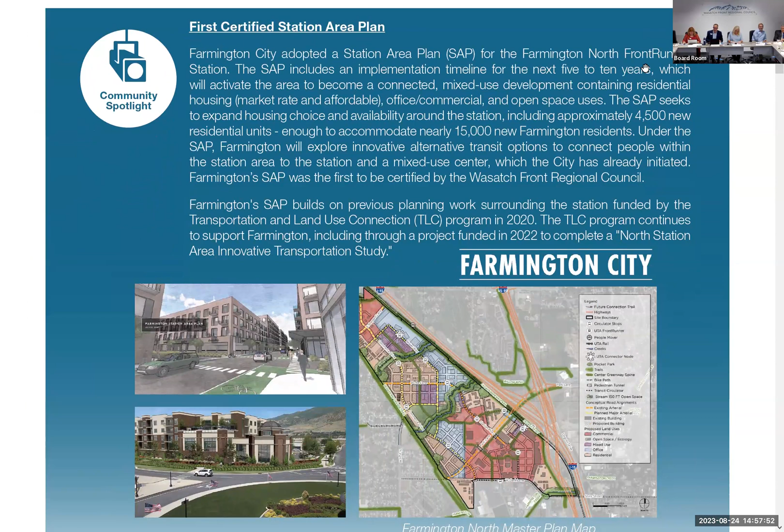And I just want to highlight a few of these efforts in your communities. The first station area plan that was certified, Farmington City. We were able to help Farmington with TLC funding to develop that station area plan around their FrontRunner station, housing, transportation, mixed use around their FrontRunner station.

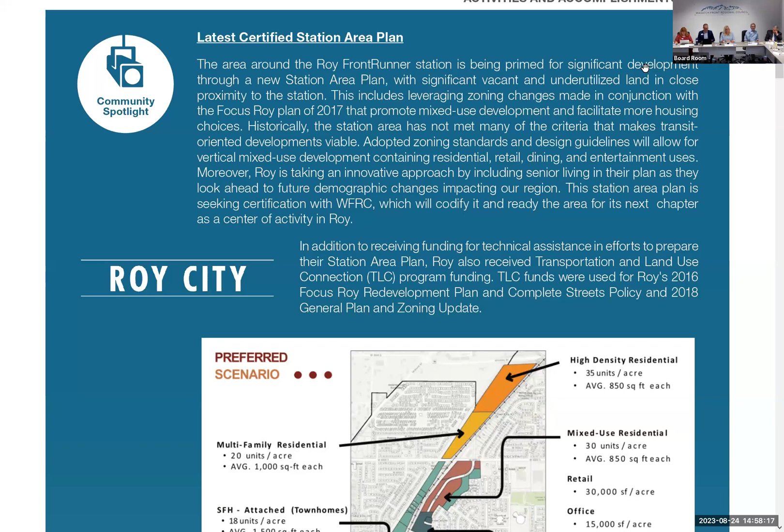Mayor Dandoy, we were able to support Roy City over the years, and we're going to be looking to certify. You'll have the opportunity to certify the Roy station area plan around their FrontRunner station. And we've been able to partner with Mayor Dandoy and the community to develop that station area plan in Roy.

Mayor Dahle, we've been able to help Holladay City, as you know, with multiple TLC awards for development in Holladay for their active transportation study, their Wasatch Boulevard master plan, working on their general plan update with multiple awards over the years. And Mayor Petro in Layton City, again, multiple awards in Layton City for 5 TLC projects over the years. Their effort Envision Layton, their town center master plan, developing their long-range economic development plan.

All of these, if you add them all up, we have been able to support 150 projects or efforts, planning efforts in communities around the region. And again, they are all designed to help your communities and help our region as a whole implement that Wasatch Choice Vision and ultimately promote great quality of life.

Now, it's not just about planning. We also provide really high quality data and tools and analysis, mapping work that we offer, forecasting and modeling. This is in the technical expertise space that we offer, and then analysis.

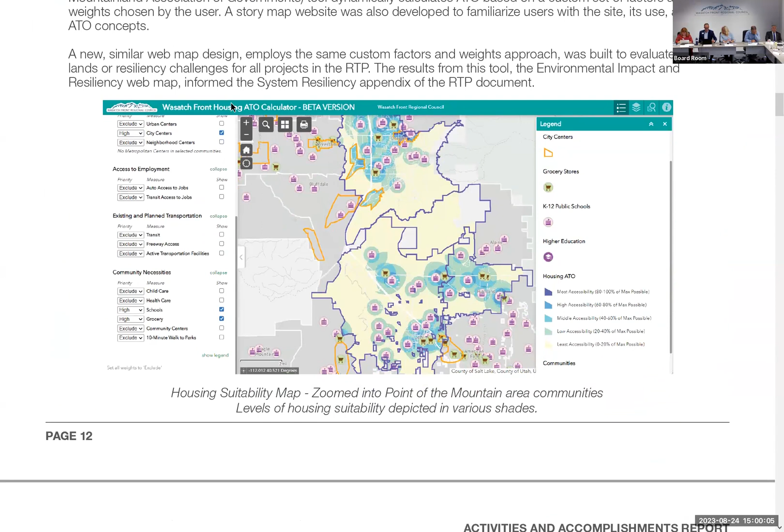Lots of more information in here. I'm sure all of you are going to read this full report word for word. You've probably all read it already. So I'm going to skip over some of the details here. Oh, thank you, Mayor. Of course you did. That's why you're the chair.

We also, of course, we've talked about the Wasatch Choice Vision. In transportation, there is a statewide Utah Unified Transportation Plan, and all the transportation agencies working together are putting this together, and it was on track to be completed in October and then shared with everybody looking ahead to October. So we're looking forward to that.

Okay, goal number 2 is to effectively administer ongoing plans and programs. This is our core transportation work, and at the heart of it is collaboration. We work with the cities and counties and so closely with UDOT and UTA, and I want to express appreciation, Carlos and everybody at the UDOT team and to the UTA trustees and all the staff. That partnership in transportation planning is so solid. It's the best that I'm aware of anywhere in the country. We should all be really proud of that.

And we know that this year in adopting the TIP, in adopting the regional transportation plan, there was significant public interest. You all remember this, of course. And I think that that is an indicator of the fact that these issues that we work on here together, they matter. They are important to the future of our region. I am proud to say that ultimately the regional transportation plan was adopted unanimously. And I hope that we handled and conducted our work in that process, demonstrating competence and integrity and ensuring that we followed a good process where people's voices were able to be heard. I think having that process and the dialogue and engagement leads to better plans and to better outcomes ultimately.

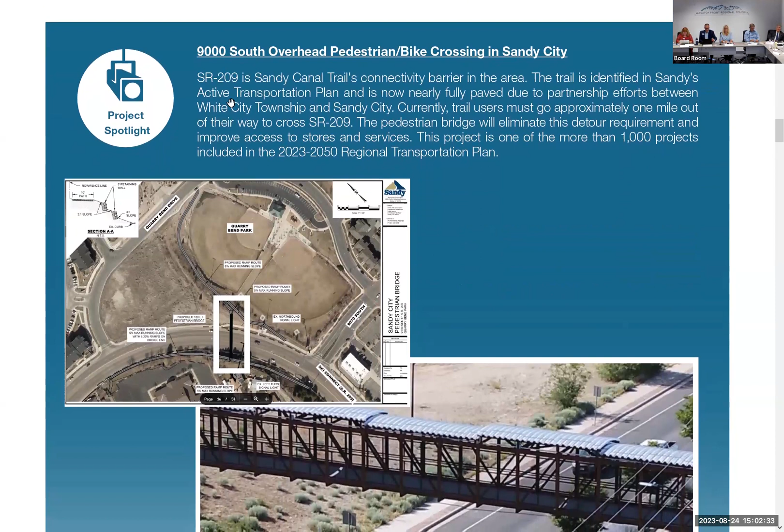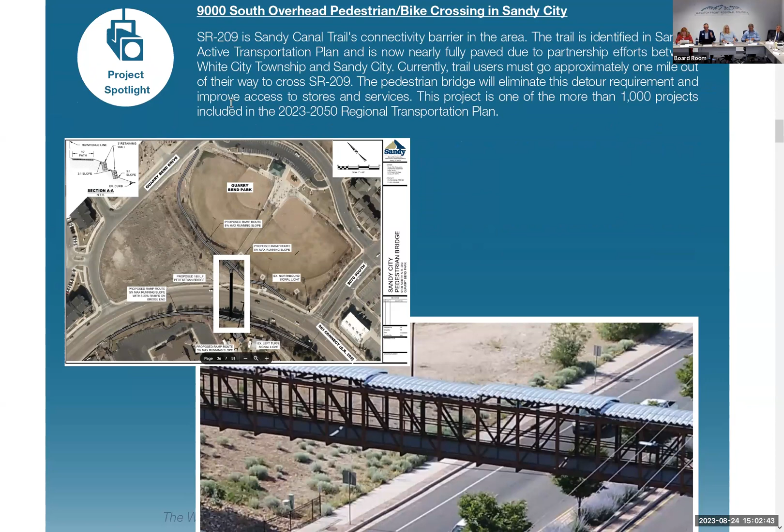Now, what are some of those projects? For example, in Sandy City, and I know Mayor Zoldan is online with us, the 9,000 South overhead pedestrian and bike crossing to give people better access by bike and by foot within key areas of Sandy City.

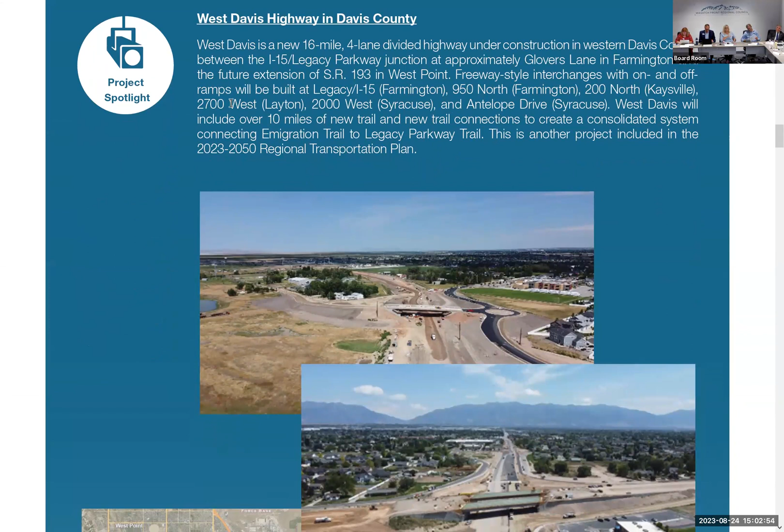Major roadway projects like the West Davis Highway, being constructed now in Western Davis County, emerge out of the planning process. Those are elements in the regional transportation plan, which covers the next 20 to 30 years.

The TIP, the Transportation Improvement Program, covers projects anticipated in the next 5 years. We'll get to action on the TIP later in the meeting. Part of what we do is provide funding directly to your communities.

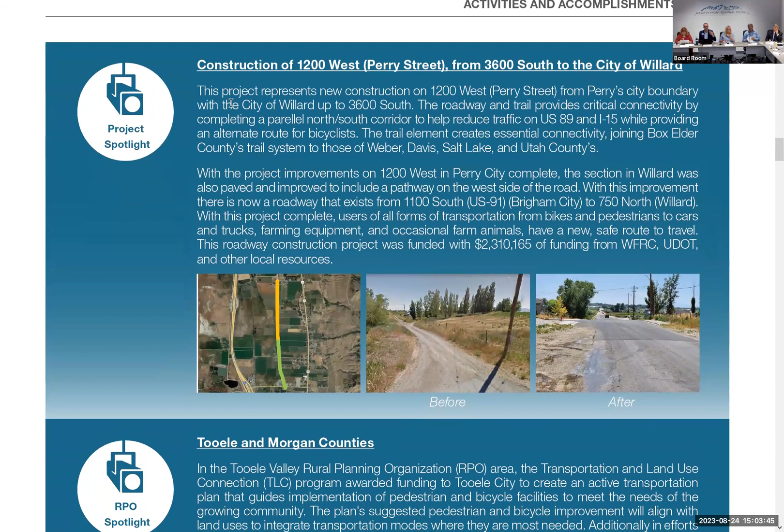In the last year, we funded 41 projects totaling $67 million, like expanding green bikes in Ogden City, Mayor Caldwell, and in Box Elder County, providing funding to construct 1200 West to connect the cities of Perry and Willard.

In Tooele and Morgan counties, planning works somewhat differently than on the Wasatch Front, Commissioner and Council Member. We support the rural planning organizations there and work with UDOT and UTA on transportation planning. In Tooele County, we funded an active transportation plan. In Morgan County, we provided funding for the Weber River floodplain mapping study, really important given all the rain we got this year. We're happy to help all our communities around the region.

Now I'll skip to goal number 3. We're talking about a lot of funding, right? How does this stuff get paid for? Where does the money come from?

Part of the work we do in goal number 3 is providing subject matter expertise to federal, state, and local officials and policymakers.

And I hope Representative Musselman says, yeah, you're providing good expertise at the state level. Thank you, hopefully. Yes, he nodded yes, terrific, okay.

At the federal level, we've worked to help make sure there's stable, predictable, ongoing funding for transportation. You all remember the relatively recent adoption of the Infrastructure Investment and Jobs Act.

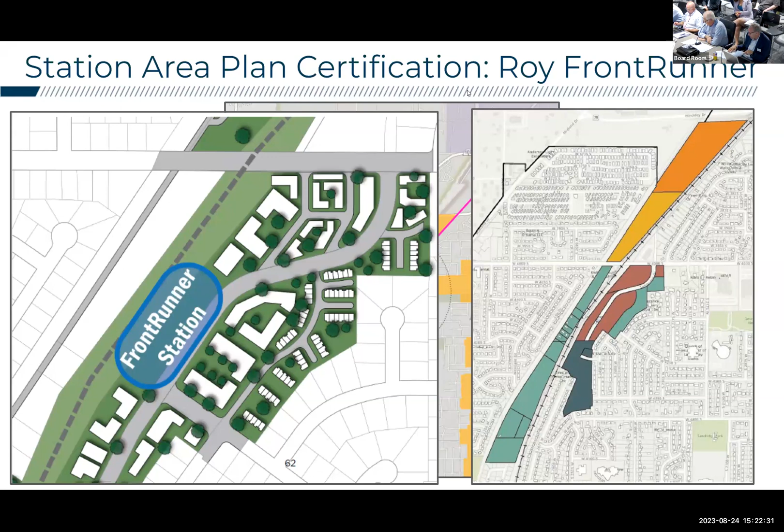I would make the motion to certify the Roy Area Station Plan as has been presented. And I will enthusiastically second.

Okay, I'm gonna have to choose then between Harvey and Shepherd. I don't want that on me. No, I know. Okay, we'll give the second to Commissioner Harvey then. Okay, thank you very much.

We have a motion and a second to certify the station area plan for Roy City. Is there any discussion to this motion? All right, seeing none, all in favor, please say aye. Aye. Aye. Any opposed?

Congratulations and well done. Thank you. Congratulations, Madam Mayor.

Chair, now let's consider the South Jordan TRAX Station at 4800 West and the Old Bingham Highway. This is a little different than others the Regional Growth Committee has considered because there are some impracticalities with some station plan requirements being noted by South Jordan. Meg, would you help us introduce this concept?

Sure, thanks Mayor. The South Jordan segment of the 4800 West Old Bingham Highway TRAX station is a little different. In the original legislation, and as amended this year in SB 27, there's a provision for prior actions and impracticabilities, because we know these stations have been there a while and there may be uses or conditions that exist that won't allow cities to meet the requirements of station area planning. That's sort of the case here, though South Jordan's done a lot of great work in this area. It's maxed out in its ability to meet the station area planning requirements. In the role of the MPOs to certify these, staff does a thorough review. We've reviewed this station, and we did make a positive recommendation for certification to the Regional Growth Committee, who have recommended that council certify.

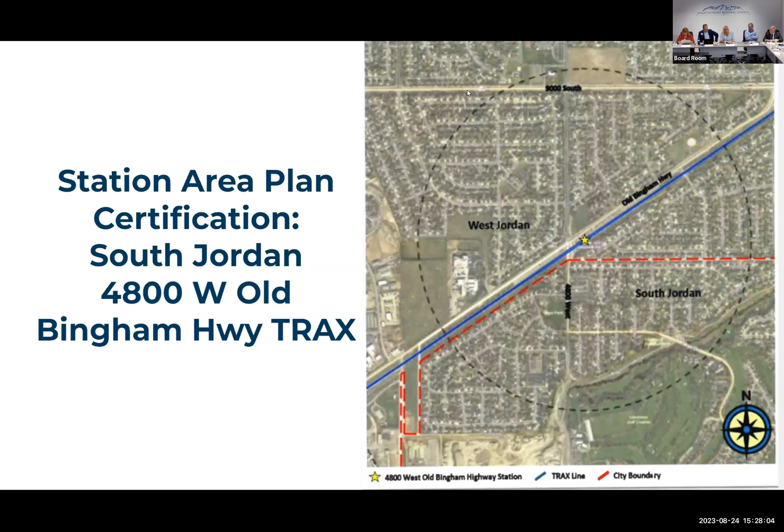I'll abstain from voting, but I will ask if there is a motion to approve the South Jordan 4800 West Old Bingham Highway Station Area Plan. Mayor Ramsey, Jeff Silvestrini: I'll make the motion to approve the South Jordan 4800 West Old Bingham Highway TRAX Station Area Plan.

And I'd just like to second what you said. I think the wisdom of the legislature in crafting this bill with the flexibility that it has is super important. We're trying to address our growth, but we also have to address practical realities on the ground. This plan does recognize the significance of that park. The transit station serves that and the rest of your community, so I think it's a worthy plan, should be approved.

Amy Winder Newton, Salt Lake County: I'll second the motion.

Thank you. We have a motion and a second. Is there any additional discussion to this? Okay, seeing none, all in favor, please say aye. Aye. Aye. Is there any opposed? Okay, thank you. I appreciate that.

Before we move on, I'm going to turn this meeting over to my colleague and friend, Commissioner Stevenson. I have to ask to excuse myself. I need to go, I have a plane to catch. So we're going to turn to our Vice Chair, Commissioner Bob Stevenson, to conduct the rest of the meeting. I appreciate all of you and look forward to seeing you again soon. Thank you, appreciate it, Dawn.

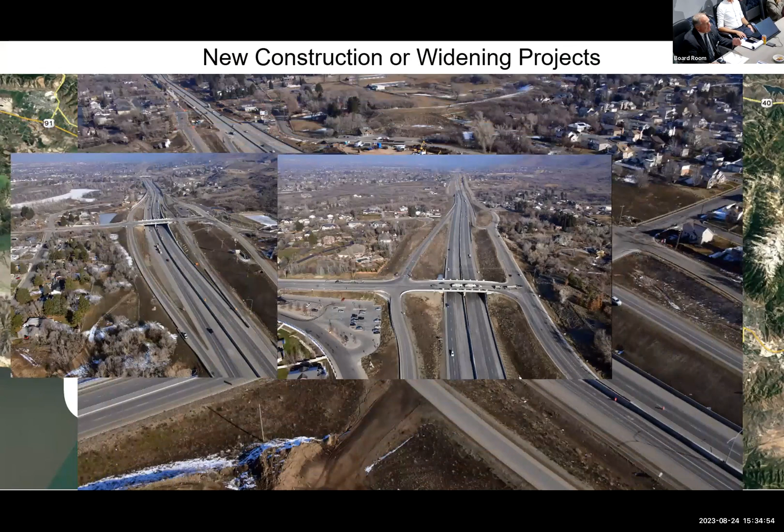Here's a few examples of projects that are in the TIP. These are the new construction and widening projects. Some of these are just finishing up, some are in the middle of the project, but they give an idea of the impact and significance of these projects along the Wasatch Front.

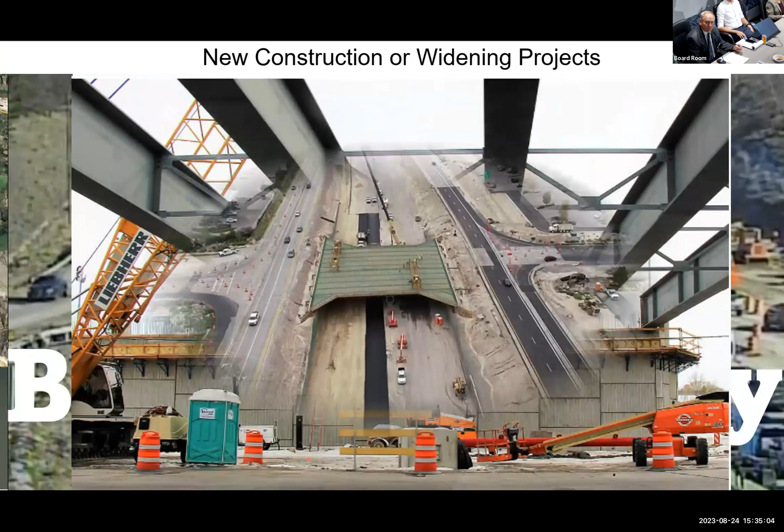Isn't it cool to see a tractor pushing dirt?

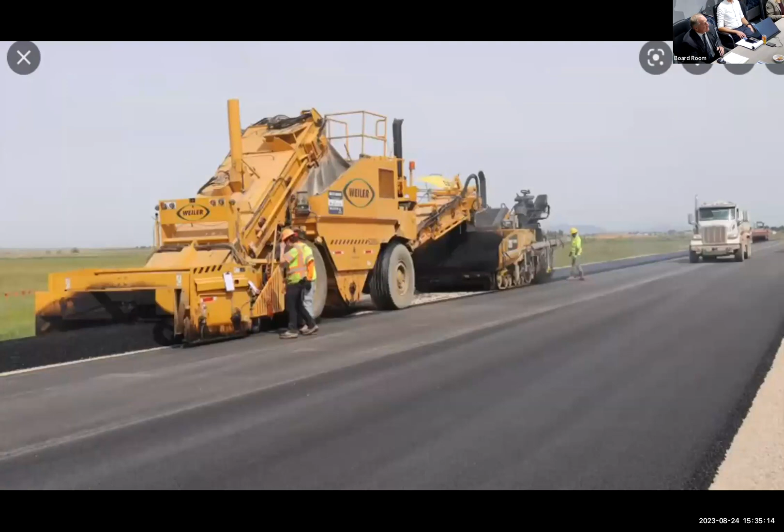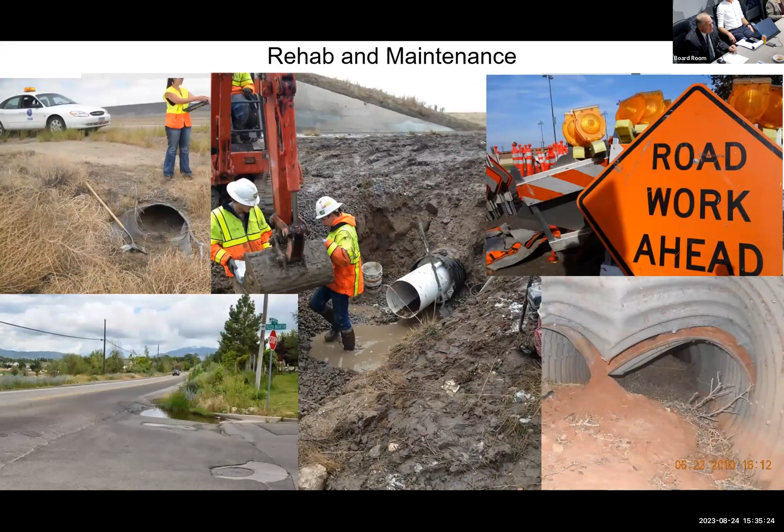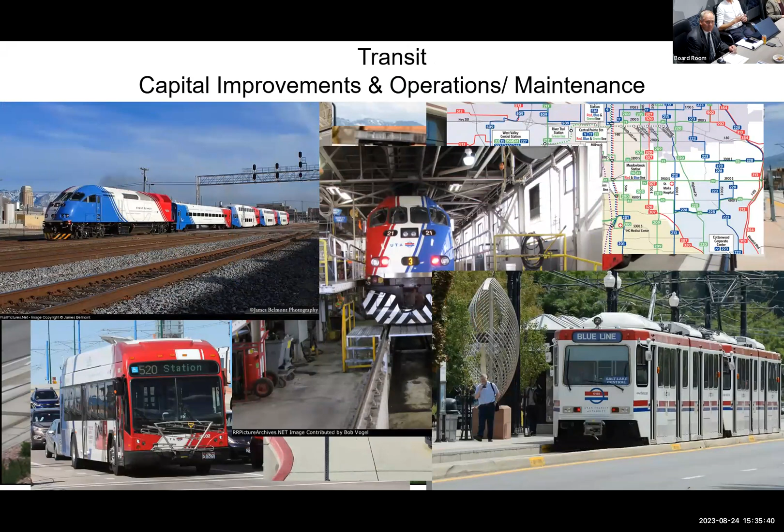Anyway, then we get into the rehab and maintenance type projects. Some of these go along and aren't really even noticed until there's an issue. We have operations and safety projects, and a lot of these happen to keep all of us safe. And then we have transit capital improvements and operations, and pedestrian and bicycle type improvements.

All of these projects represent millions of dollars. In fact, in the 2024-2029 Transportation Improvement Program, we have over $10 billion of projects over the next 6 years—thousands of jobs, economic growth and development, mobility and access along the Wasatch Front, preservation of life, and promoting the quality of life we've become accustomed to.

These projects, or the TIP, have to be financially constrained, have to conform to air quality requirements, and need to be reviewed by the public and then approved by the regional council.

So we went out to public comment and provided the information for the projects so that we were financially constrained, identifying all these projects and how they would be included in the TIP over the next 6 years. We had the air quality memorandum demonstrating that we conform. We also had the opportunity to take this information out for public review and comment.

We also encouraged them to come to the webpage where they could look at the TIP and access our interactive map. Through the course of all of this, we received a pretty good amount of public comment. In your meeting materials is a summary of those public comments received, and each public comment has also been identified.